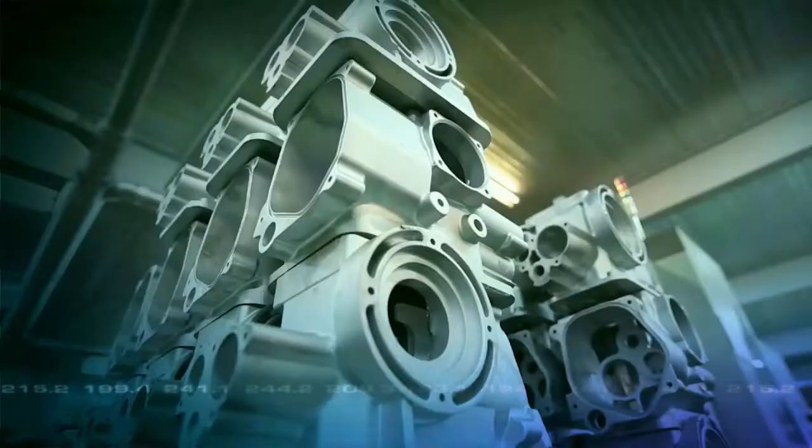The modern world is in the global era, where the global villages become one. Here's a company that puts forth its best innovations and overcomes all challenges to stand tall as a global best company. The company that's always at the top, with its burning enthusiasm and love for challenge. The company that makes its clients' development its priority.

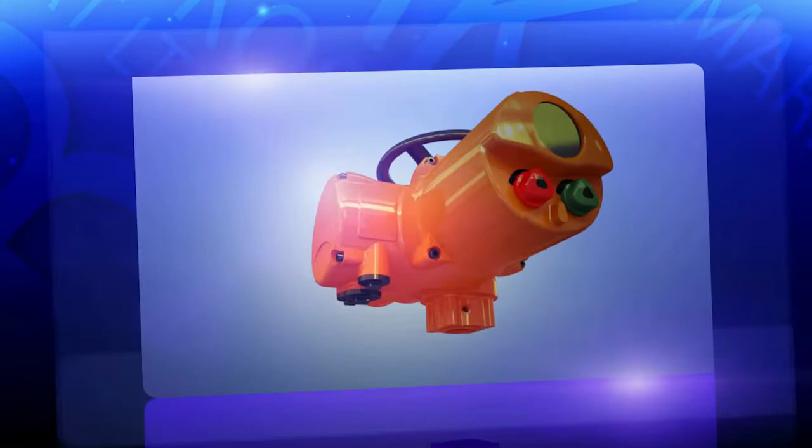Since 1987, Enertork has grown based on its mottos of reliable technology development and customer satisfaction. As a result, Enertork has become the largest company in South Korea's electric actuator field, with more than half the market share.

Enertork first acquired Norway's DNV ISO 9001 certification, followed by the safety class nuclear powered generation, Class 1E classification, and the FM and ATEX certifications. The company landed on the Forbes magazine Asia's 200 Best Companies as a promising up-and-coming small company. Enertork is now expanding its foothold in the global market.

Enertork's clients are becoming diversified, from the water treatment industry to power generation and petroleum and chemical plants. And its exports to Japan, Middle Asia, Southeast Asia, etc. are continuously rising. In particular, as the Middle Asian nations are aggressively expanding their infrastructures, Enertork's exports are explosively increasing.

Enertork's main products are multi-turn actuators such as the TM series and LTMD series, quarter-turn actuators such as the TQ series, worm reducers such as the MW series, and the next-generation model multi-turn actuator TX series.

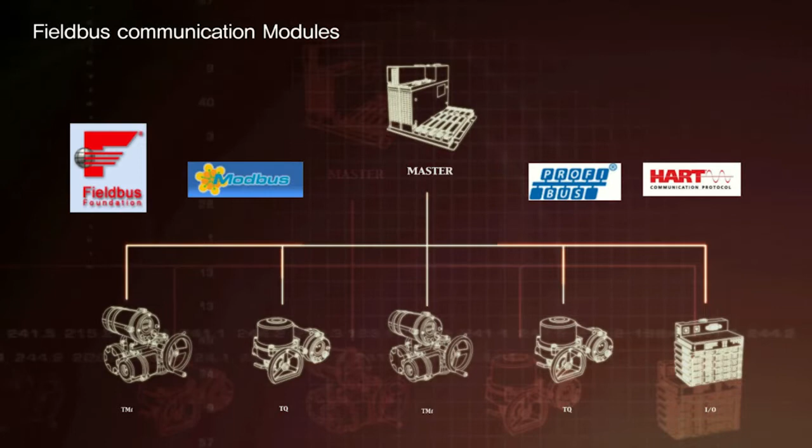Especially, the company self-developed a new concept intelligent actuator applicable with industrial field bus communication, corresponding to the utmost new industrial trends and responding to its customers' various demands.

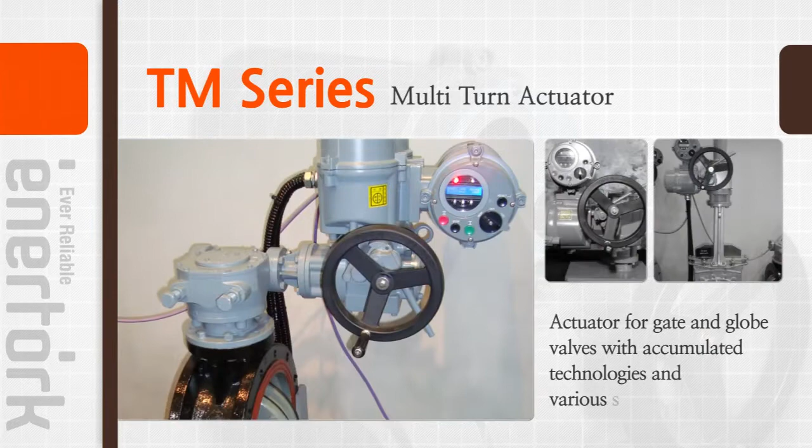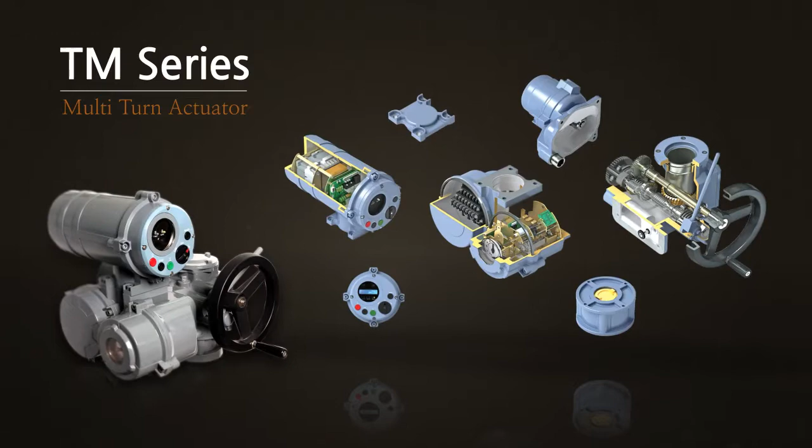The TM series actuators are our staple products, developed with Enertork's 20-year accumulated technologies and various field experiences. Their features include a modulated structure that's easy to assemble and disassemble. They consist of the waterproof type and the explosion-proof type, both of which meet the IEC standard.

In particular, for the explosion-proof type, Enertork has acquired KTL certification in South Korea and FM and ATEX certifications from overseas.

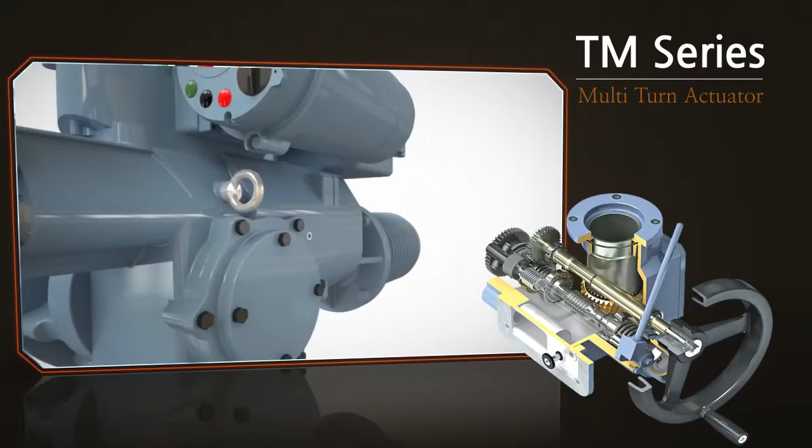All the hand wheels of the TM series actuators have independent hand wheel shafts connected to the worm gear through an intermediate spur gear, thus enabling safe manual operation.

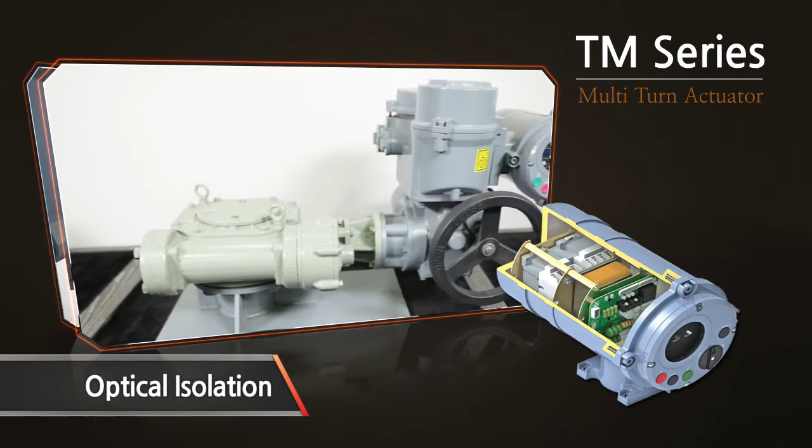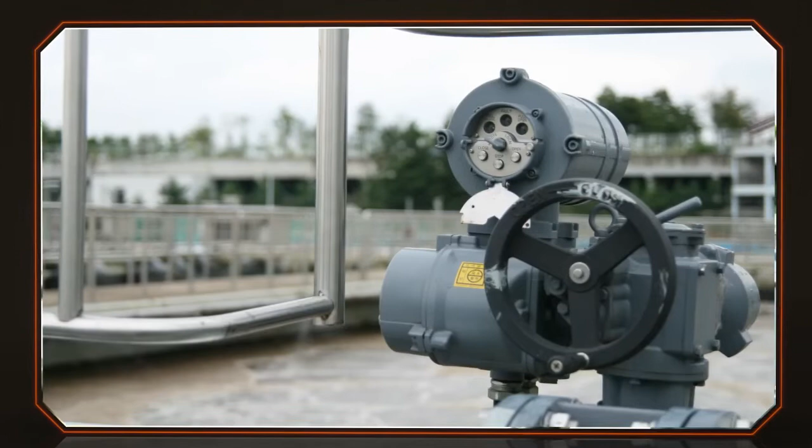The product's electrical and control features include a waterproof, non-penetrating integral unit. The inner circuit is completely isolated from the remote signal by the opto-isolator to withstand outer disturbances, such as the impulse current and surge. All the exposed parts of the actuators have light aluminum alloy die casting, which makes the actuators easier to handle at the installation site.

The LTMD series actuators were developed as part of a collaborative R&D project in association with Korea Hydro and Nuclear Power Company for application in the harsh operating environments of nuclear power plants.

The LTMD series actuators are unique Safety Class 1E electric actuators in South Korea that are currently safely in service at Gori Nuclear Power Plant. Enertork is currently working hard to win contracts for supplying the LTMD series to overseas nuclear power plants.

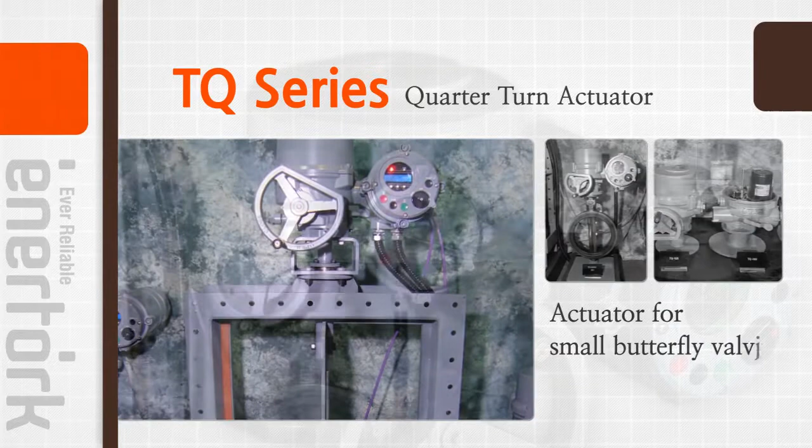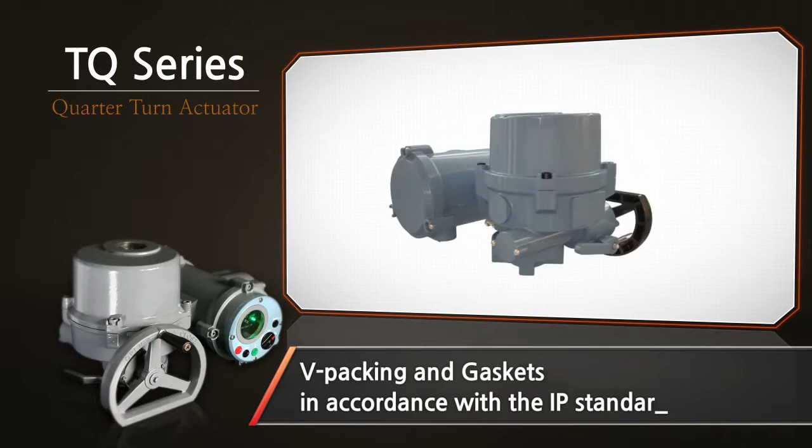The TQ series quarter-turn actuators are extensively used for small butterfly valves, ball valves, and dampers. These actuators adopted external boxes made of hard anodized aluminum alloys, are lightweight, have strong anti-corrosion, and guarantee double sealing structured V packing and gaskets in accordance with the IP standard 68 class.

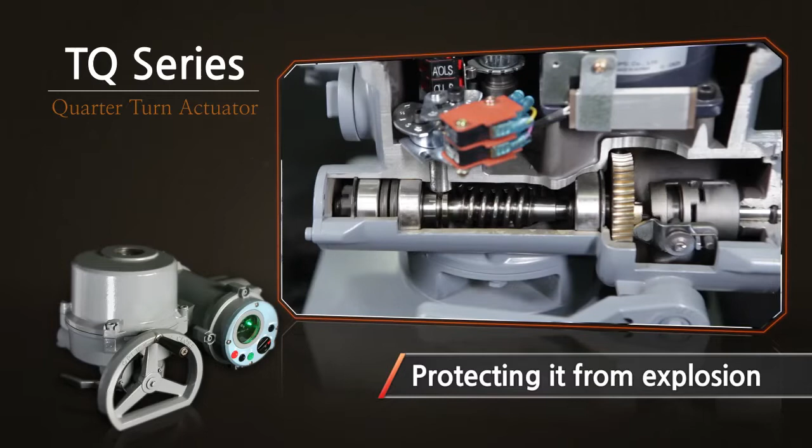In addition, this series secures a flame passage in accordance with the IEC standard, protecting it from explosion, and adopts a magnetic contactor with mechanical interlocks to enhance the safety of the motor's stable operation.

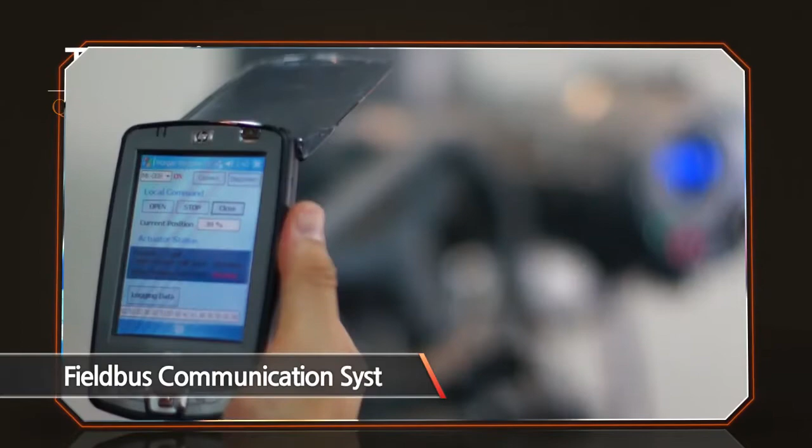In particular, the system, which adopted a two-wire control fieldbus communication system, enables the economically concentrated management of multiple actuators.

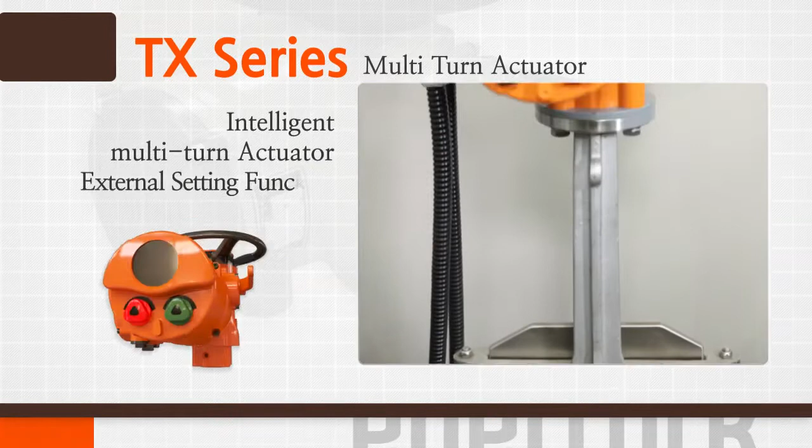The next-generation model TX series actuators that were introduced to meet the global trend are intelligent multi-turn electric actuators that boast enhanced control performance with an external setting function, a self-diagnosis function, etc., using telecommunications.

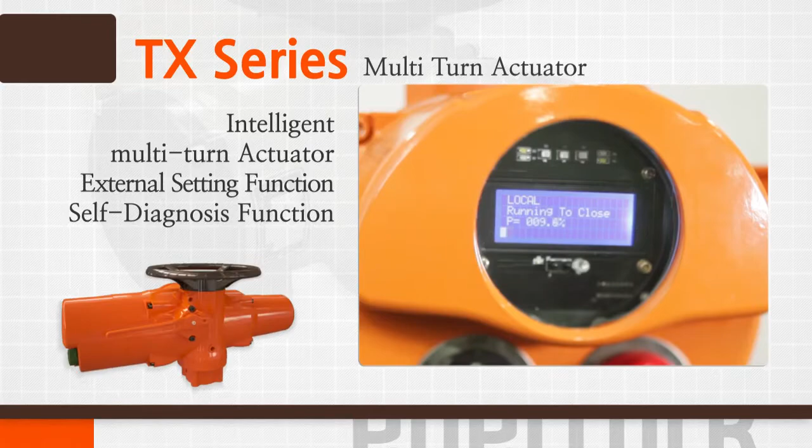The series can function for setting from outside the actuator position and torques to the opening and closing directions of valves, using the telecommunications and operating panel.

Without opening the actuator case, the actuator can be observed and controlled through wired communication using the industrial field bus or through Bluetooth wireless communication.

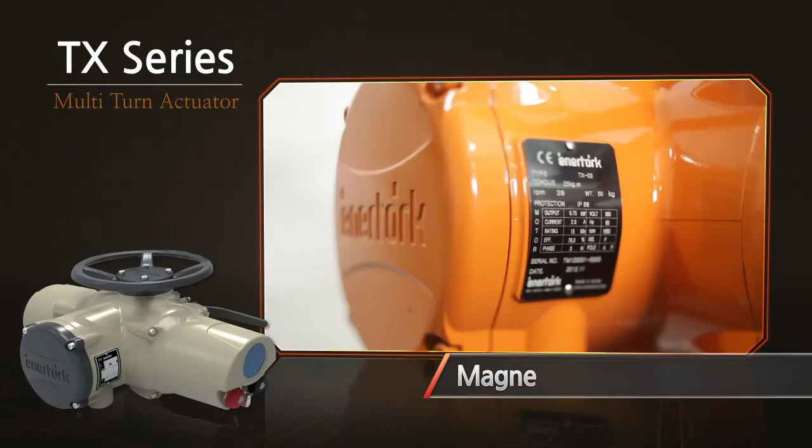The products are integrated with a magnetic absolute encoder to detect positions and electric torques for conducting precise and highly reliable control functions.

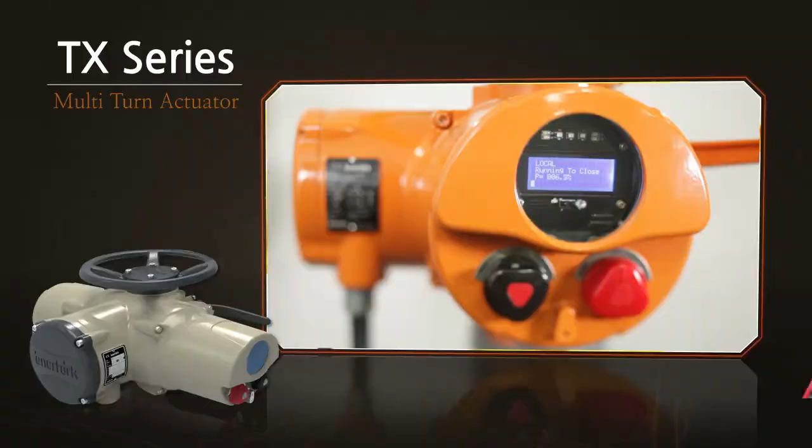Besides, the products meet the client's requirements for more convenient and smarter appliances by adding various self-diagnosis functions, historic management, etc.

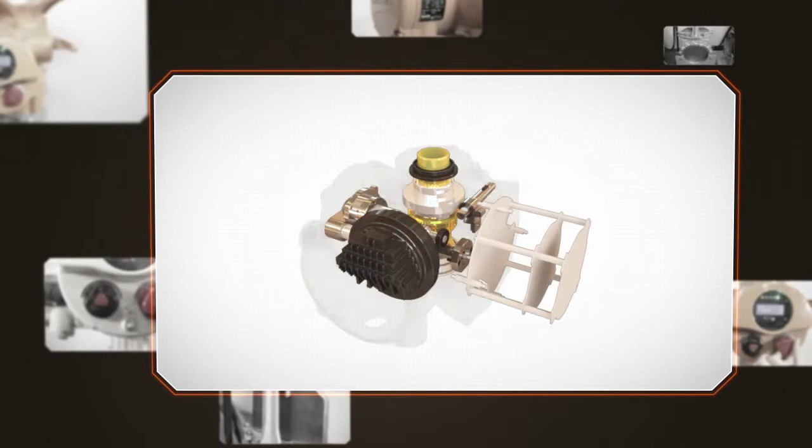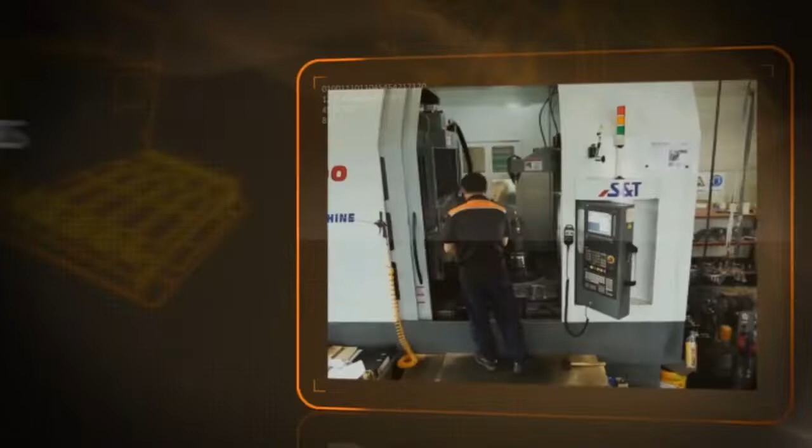Enertork, which cleverly overcame the industrial recession that struck South Korea and is currently enjoying continuous growth, writes a new history of the world actuator market by constructing a global network based on reliability and cooperation.

The company tightens its grip as one of South Korea's representative brands by aggressively investing in self-development as well as in the improvement of its quality distinction, and by constructing a stable production system.

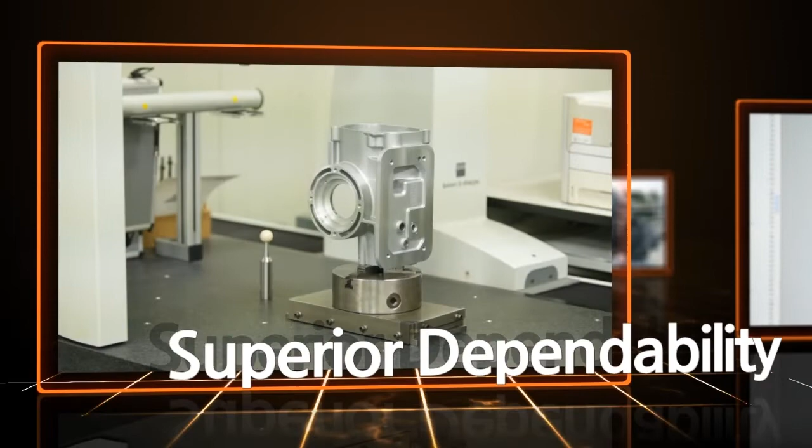Especially, the excellence of Enertork's products has been proven at the sites where its industrial field bus communication control systems, Profibus, Foundation Field Bus, Modbus, and HART Communication have been installed. Enertork will always continue to serve its customers with the best quality and superior dependability.

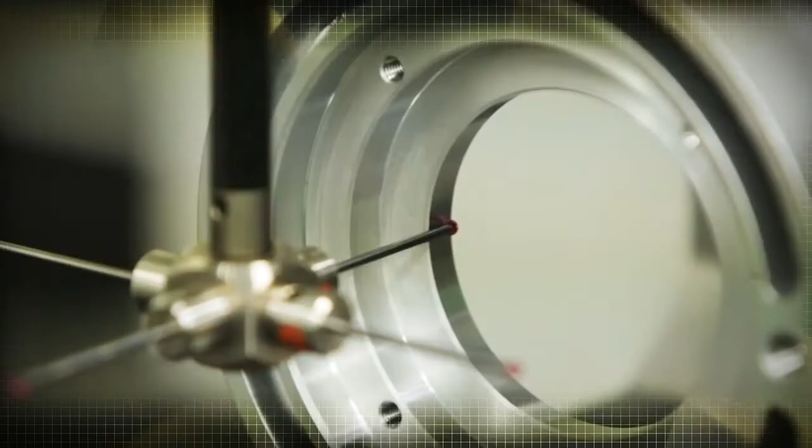There are people who have stuck to the basics, with their sincerity seen in the care that they put into even the smallest things. The company that makes the developments of its clients its highest priority, Enertork.

The company has the pride of being South Korea's best brand and does its best to realize its one-step upgraded value. In the near future, you will certainly hear the company name Enertork.

The dream of the world's top-rate enterprise specializing in electric actuators. The dream of Enertork will come true.